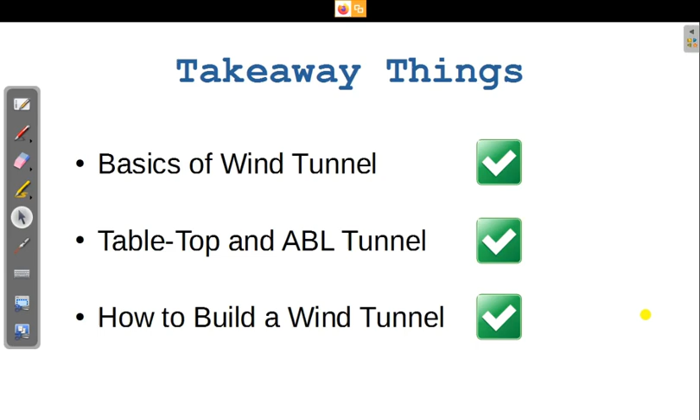Each and every part we will discuss in detail about the physics. Mathematics or formulas I will not discuss, but I will tell you where you can find them and how you can get those calculations done easily, because those are straightforward. Rather, we have to give more importance to the physical aspects. So I will be discussing a tabletop wind tunnel and an atmospheric boundary layer tunnel, giving you an example of how a wind tunnel was built in our laboratory.

Coming to the first point, the definition of wind tunnel. I hope most of you might have used a wind tunnel in your aerodynamics or advanced fluid dynamics laboratory. Typically we do some experiments there, and a wind tunnel is defined as a device, especially a test rig if you are continuously doing tests, or an experimental setup wherein a person can produce a controlled or conditioned flow. The flow can be of any fluid, water or air, based on what kind of study we are going to do. If we are using air, it will be about aerodynamics, so a wind tunnel is a device that produces conditioned or controlled flow of air to study aerodynamics.

I hope most of you know about aerodynamics. If you do not know, aerodynamics is the study of flow over bodies or bodies moving inside a fluid, and how interactions happen, what forces and moments are generated. So we will be dealing with these in aerodynamics. Mostly, a wind tunnel is a device dedicated for aerodynamic study.

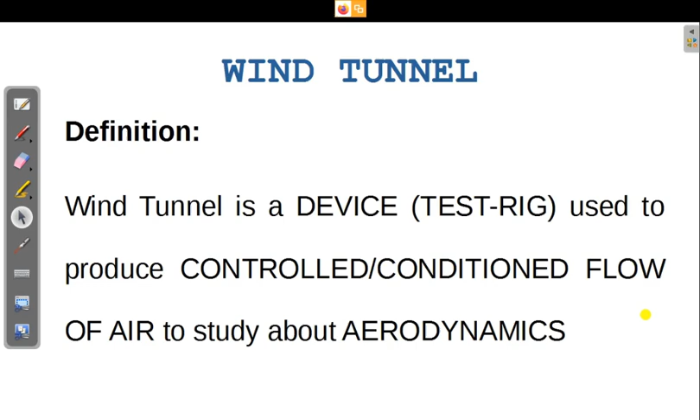So where do we use a wind tunnel, why do we use it, and what can we get out of a wind tunnel? Most probably we see wind tunnels in aerodynamics laboratories, aviation people use them, some atmospheric people use them, and you might see usage in automotive aerodynamics, where people study flow over cars and so on.

A typical usage of a wind tunnel is to find pressure values from objects we keep inside it to test, such that we find the pressure distribution over the particular body, and we want to know about forces and moments generated on the body. That's one particular aspect. Another aspect: if you want to know what kind of flow field is happening over that body inside the wind tunnel, we can go for visualization techniques. There are many visualization techniques available to see how the flow field is. So these are the typical requirements which the wind tunnel caters to.

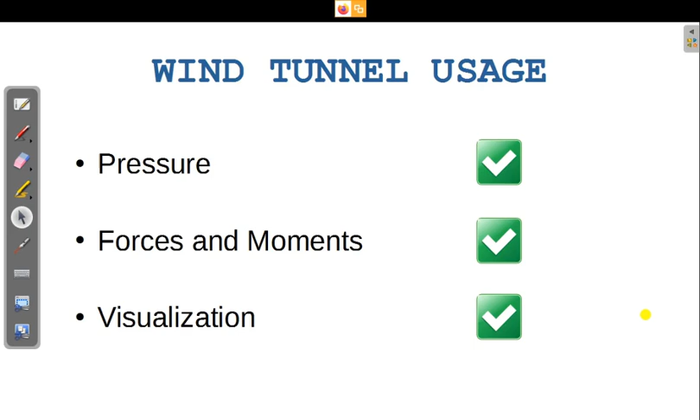So if you know what is a wind tunnel and why we are using it, you might ask what are the types of wind tunnel available and how we can classify it. The classification of wind tunnel can be done based on the flow speed.

Based on flow speed, we classify flow regimes into subsonic flow, transonic flow, supersonic flow and hypersonic flow, in comparison to the speed of sound. When the flow is comparable to the speed of sound, it is sonic flow, and above it, it's supersonic flow. This is typically expressed by a non-dimensional number called Mach number.

So if Mach number is 1, it's called sonic. Mach number greater than 1 is supersonic. Mach number greater than 4 or 5 is called hypersonic flow. If it is typically less than 1, we call it subsonic flow, and if it is less than 0.3, we say the flow is completely incompressible. So based on flow speed, we can classify wind tunnels into various types.

Based on flow direction, we can say whether it is blow down type or suction type - whether we are taking in air from the atmosphere, conditioning it, allowing it into the wind tunnel, and then discarding it to the atmosphere, or the other way wherein we take air, push it, test it, and then discard it. So two types of flow direction based classification are available.

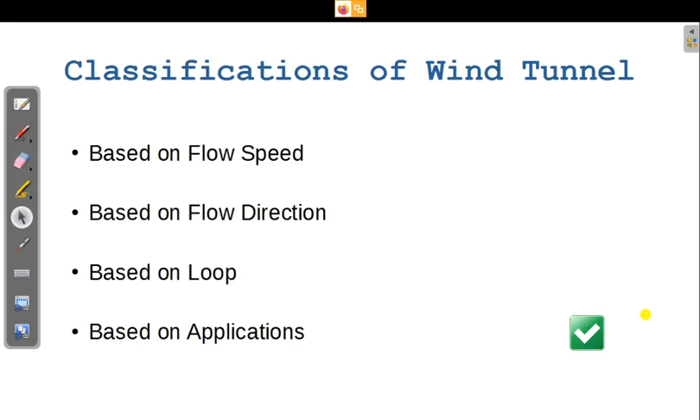And there are a few wind tunnels based on applications or design aspects - that's where I mentioned a tabletop tunnel and atmospheric boundary layer tunnel. Hope I have given you a brief idea of what is the classification of wind tunnels.

Moving ahead, in this particular webinar I am going to concentrate only on one particular wind tunnel. This is a subsonic wind tunnel which we have seen in our labs, but we might not have seen it in a perspective where I see things differently from how other people see. I will be discussing those aspects mostly in terms of physics. If you understand this, I think it's going to help you think in your own way how I can come up with a wind tunnel by my own from the parts available around us.

So this is a typical subsonic wind tunnel which you have seen in your laboratory, or if you Google you can easily find it. Thanks to Mr. Gousik who designed this in a very short time for the webinar. If you see this picture on the extreme right side, I have mentioned the blue arrows - these blue arrows are the flow which we are taking from the ambient conditions, that is from the surroundings.

Then you have a constant area section - this is the flow conditioning unit. Moving forward we have a test section, then a diffuser, and then a motor. Inside this diffuser we have a housing within which a fan is placed, and this is a typical subsonic wind tunnel. With this we have associated equipments like pressure manometers or digital manometers or load balancers.

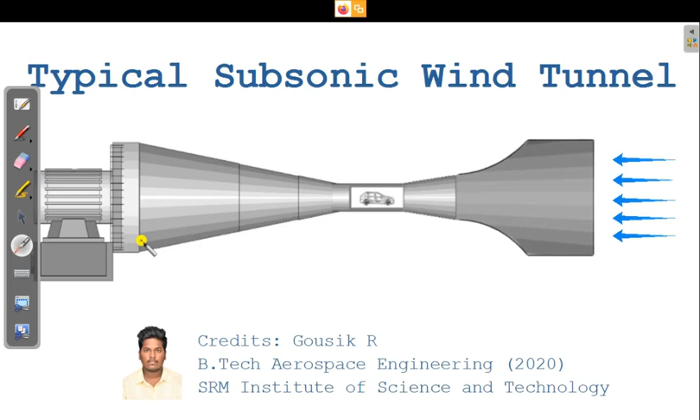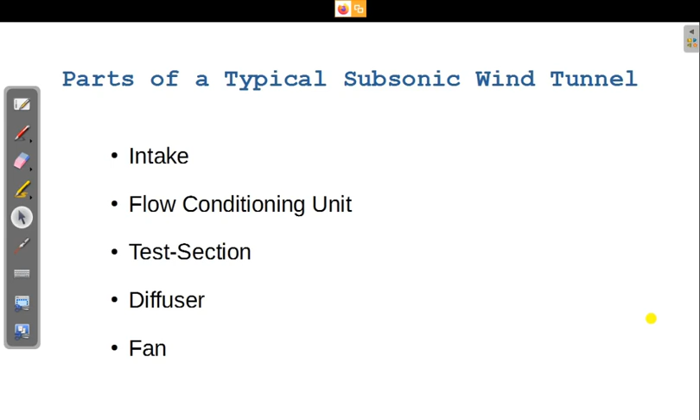So, parts of a typical wind tunnel. I have shown the parts in the schematic, so let me explain one by one. There is an intake on the extreme right side where I showed the arrow. Next, we have a flow conditioning unit - that's the constant area tube followed by a contraction section, which is also part of the flow conditioning unit. Then we have a constant tube again, which is the test section where the models are housed. Then we have a diffuser, and finally a fan, which is the source of the flow.

So what does the flow conditioning unit consist of? If you consider the definition of a wind tunnel, I used a particular phrase - we are going to use a conditioned flow or controlled flow. How to condition or control the flow is based on how you tweak the fluid flow. Control is about speed - if you have a motor connected to a fan with an RPM controller, you can control the velocity of the flow. That is the controlling aspect. The other aspect is the conditioned flow.

The conditioning aspect is what I am going to discuss in this flow conditioning unit. Typically it has the intake on one end and the test section on the other end. In between you have a constant duct within which you find honeycombs and grids, and at the end of this constant area duct you have a contraction section. So this is going to condition the flow.

So why do we have to condition the flow? That's the first question that arises. If you see typically in a room or hall, you might find people moving around, fans switched on, differences in temperature if an air conditioning unit is operating, or gradients of thermal aspects - so some flow is happening inside that environment. The flow can be turbulent, laminar, swirling, fluctuating - whatever random characteristics you want to see, all might be present in the ambience. Taking this into account, we don't want to bring all these disturbances into the wind tunnel, so we want to avoid them. That's where we go for conditioning the flow.

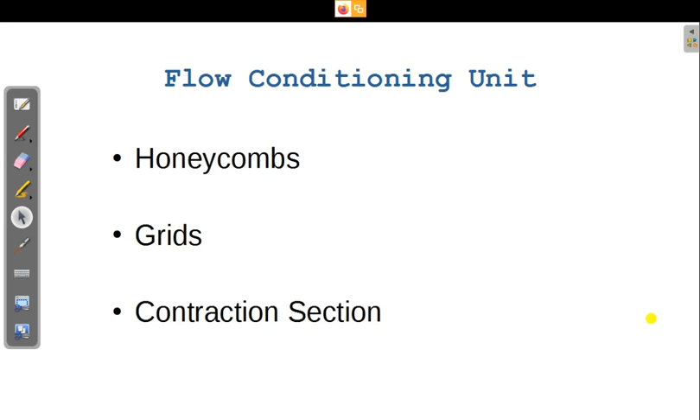The first part is the honeycomb structure. You might know what a honeycomb structure is - honeybees collect wax from flowers and come up with a structure that is almost hexagonal in shape, with multiple hexagons added together. This is found in trees at taller locations, and it's a tubular section inside each hexagonal cell where the honeybees store honey. That's where the honeycomb name came from.

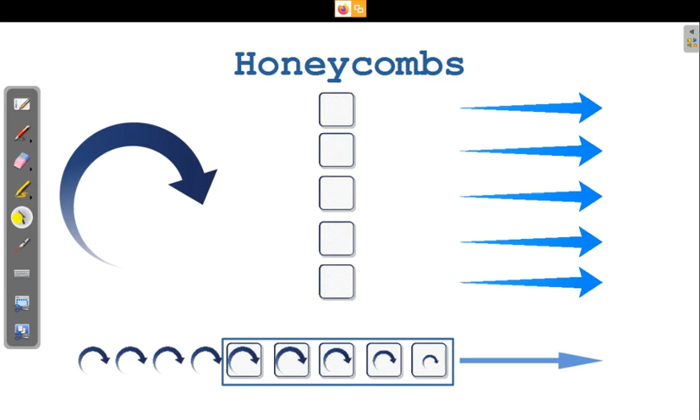Essentially, if you have a grid, you have to decide what should be the passage between the wires, what should be the wire thickness, what is the separation, and what is the porosity. You have to see what kind of friction or pressure losses it can create. So you can decide about the porosity and the vortical structures which can pass through this particular grid or mesh.

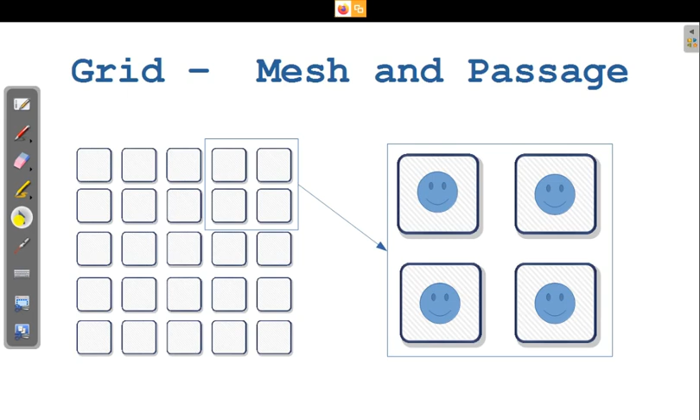So going into a typical explanation for this grid structure, I've given an analogy and a basic explanation. What is the physical background of this? If we want to see it in terms of fluid flow physics, I have to go to the next slide to explain flow over a cylinder and flow through a gap, nozzle, or orifice.

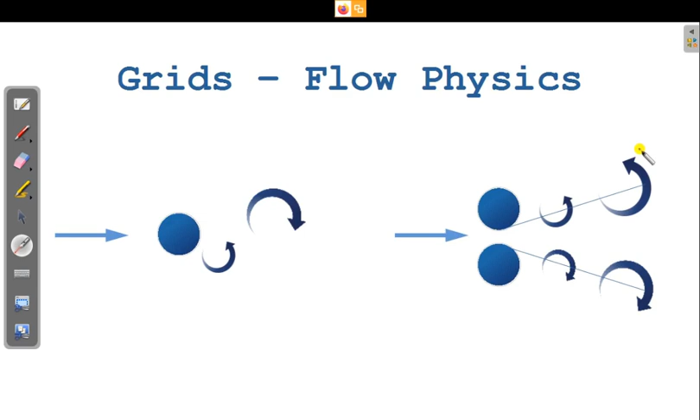So you have to know what turbulence is, because I didn't introduce turbulence earlier. So I will tell some aspects of turbulent flow. If you consider a laminar flow, it might be moving as laminates, layer by layer. And if you consider a turbulent flow, it might be randomly fluctuating, forming three-dimensional vortices or eddies, like rotating blobs of fluid, rotating pipes of fluid, rotating filaments of fluid, randomly fluctuating fluid. So it has multiple characteristics and is completely a three-dimensional flow.

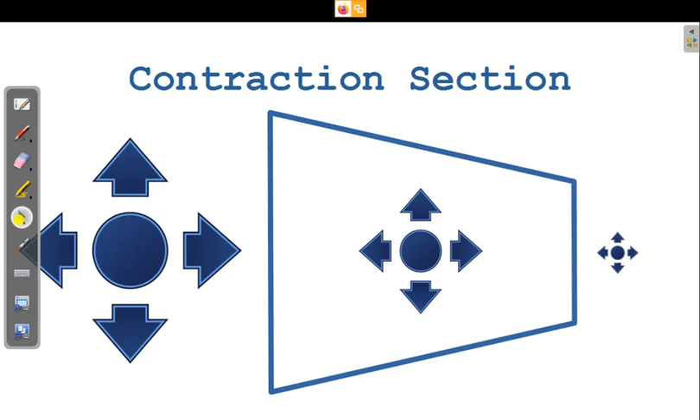Coming to typical examples, I told you about the tabletop wind tunnel which we fabricated in our laboratory. Thanks to Bunni, Rakshantha and Sanjana, these three people did this job when they were doing their bachelor degree, and this was applicable for a particular aspect of combustion phenomenon.

So I will go into the basic schematic. Why we wanted to go for a tabletop tunnel is that we had lesser space in a particular room allotted for us, which was a visualization lab. It was typically a 10 by 10 foot room, and we had a smoke tunnel there, along with another experimental setup. We had a leased space where a 2 meter by 1 meter table was allotted for us. Within that table, we had to create a wind tunnel to study some particular combustion aspect, or flow over a particular material which is burning.

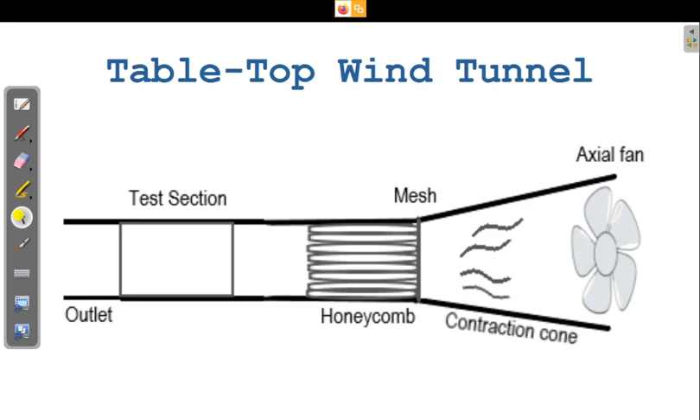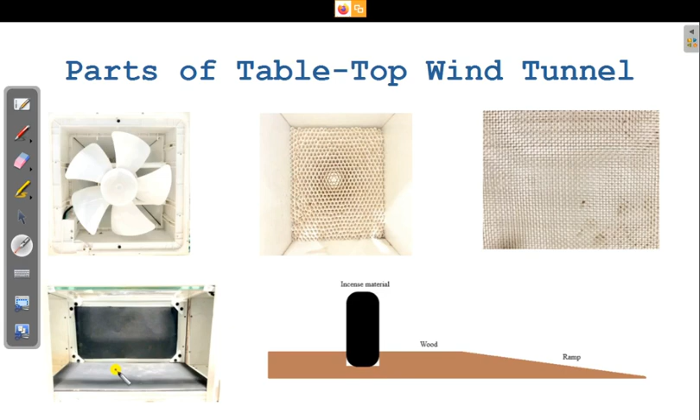So this covers the parts of the wind tunnel and the fabrication process. The result here was completely done with plywood: first designing the parts individually, then cutting and fixing them with screws. You'll find all screws used for fixing the wooden planks.

Finally, the fan was placed on the right extreme side, and you'll find a regulator, which is a potentiometer, to control the speed of the fan for controlled flow. Inside this place the honeycombs are seen, along with a grid, and a window allowing people to open the test section to place material inside and handle it. This tube is the extension connected to the outlet or diffuser.

This outcome was presented at a conference and is about to be published soon.

With this tabletop wind tunnel, one can do some basic studies. Our application was to study combustion, so we had a simple wind tunnel, not a complex profile, which was fabricated within a week.

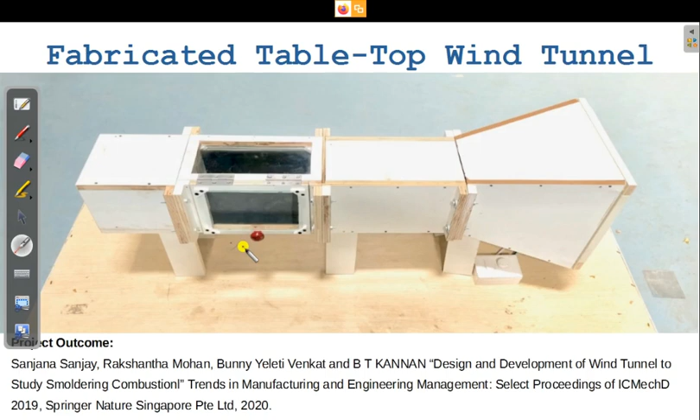I'll show some outcomes from this. What we did was take the incense material, ignite it, keep it on the bottom base plate inside the test section, and shine a laser from the top side. We viewed from the window, took videos using a high-speed camera, and then post-processed the images to get the results.

Typically on the front leading edge side you might find a stagnation happening, which means the incoming flow will have more oxygen, such that it can enhance the burning rate. If you track that particular point, you might find the highest burning has happened at that stagnation point, and the least burning on the rearward or aft side.

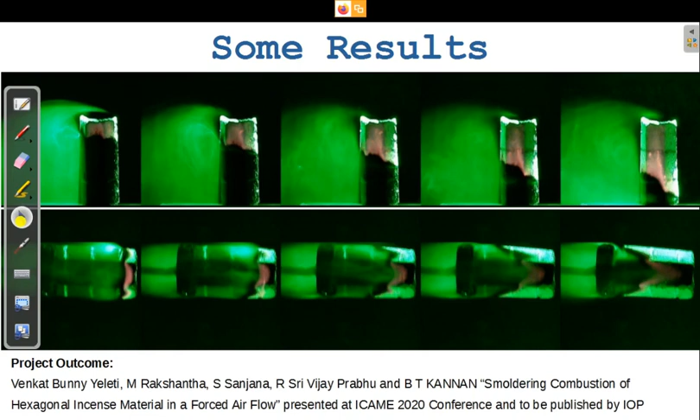I think this result was also presented in a conference, and it's to be published soon.

Moving ahead, we have another example: an atmospheric boundary layer tunnel. Thanks to Murukesh, Akhil and Saneesh, these three people came up with a huge wind tunnel, stationed in our hangar, at a cost of about 6.5 lakh rupees. Murukesh is here online, joined with us to help with queries about this tunnel. Let me go ahead and show you how these people did it and what is the physics behind it.

The basic requirement for this atmospheric boundary layer tunnel is understanding what an atmospheric boundary layer is. Typical wind tunnels have a uniform profile, meaning the velocity is uniform, but in this profile the velocity increases with respect to height.

The bottom layer is the ground, above which you find buildings, trees, and terrain. When you have flow over this terrain, the bottom disturbances create a highly turbulent flow. As you move up in the atmosphere, this turbulence goes down and you find more laminar flow.

To create this kind of profile inside a wind tunnel is a little difficult because it needs length to develop a boundary layer into a completely turbulent zone. A typical subsonic wind tunnel has a certain length, but if you want to develop an atmospheric boundary layer tunnel, it needs to be lengthier than what you typically see in laboratories.

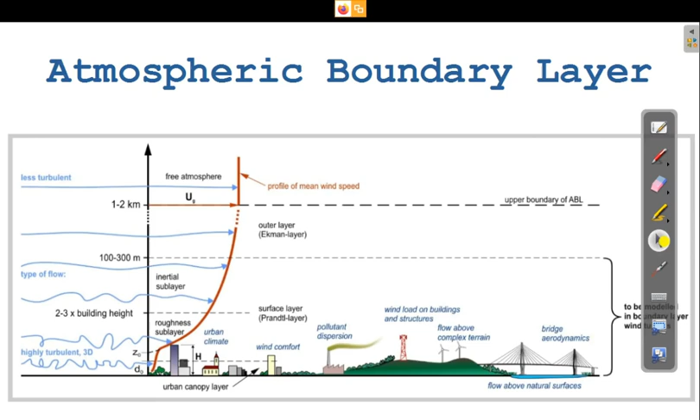Taking this into account, we started designing this particular tunnel, basically calculating the flow requirements, the test section size, and then we moved ahead with the structural part.

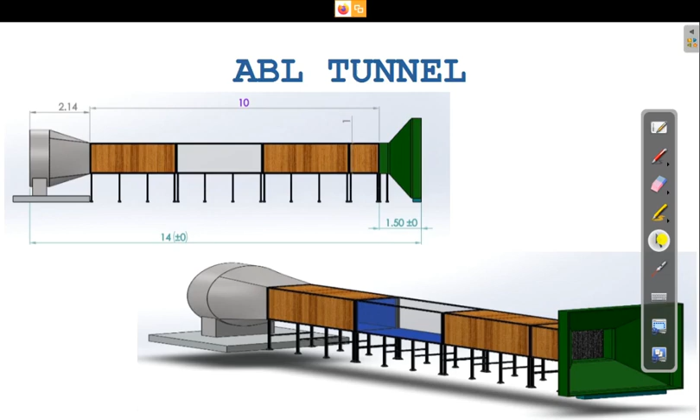With this tunnel design in mind, we went ahead with the initial fabrication process. First we had to decide how the structure would be made, and that's where we came up with the idea of using aluminum structures.

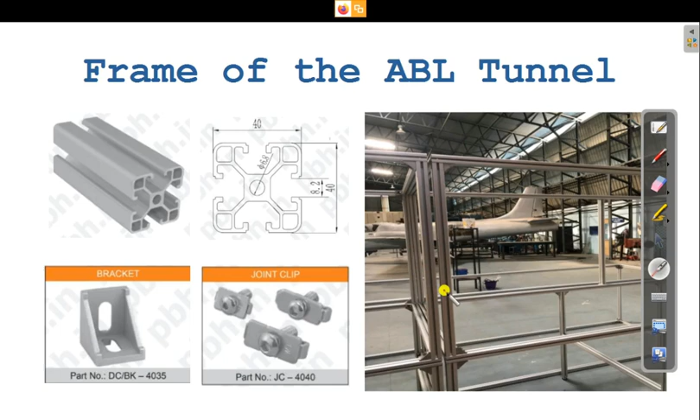After finishing this frame, people started working on the outer structures, that is the walls of the wind tunnel, and then moved ahead to other aspects. This slide will explain the phases which our group had gone through.

After creating the structure, we had a bunch of planks, that is plywood, which was strengthened and placed between the profile channels, because the profile channels has grooves to accommodate these wooden planks, such that the complete outer structure was made. Once the outer structure was made, the honeycomb structure was also made, which is shown in another slide.

Once the complete structure was done, carpeting was done inside the tunnel to produce rough surfaces, and this will enhance the production of the turbulent boundary layer on that particular carpet surface.

Then this wind tunnel test section was fixed with glass. A complete single piece of glass was held between this aluminum frame, on three sides, such that it can allow visualizations to happen.

You might also see a person moving from the bottom side, because there is an opening where a person can go inside from the bottom, into the test section, to place the model or fix the model and turn it. So whatever manipulations you want, you can go inside and do it. That's how the wind tunnel was designed.

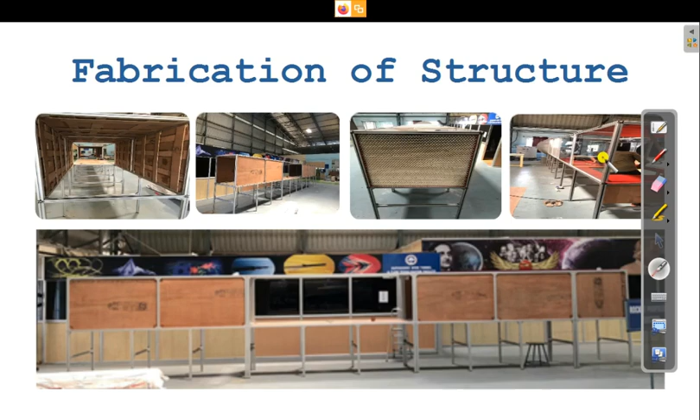For building honeycombs, either we had to go for metallic structures or commercially available products. That's where we decided to go with plastic PVC pipes, easily available from plumbing or hardware shops. We took pipes which are used for electrical wiring in buildings.

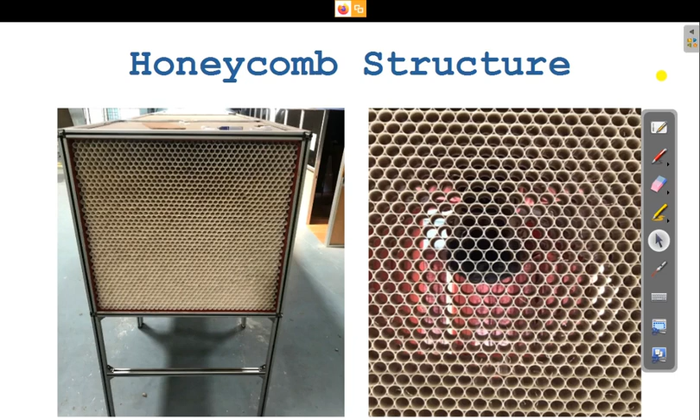This pipe was cut at a particular aspect ratio and stacked, then strengthened and stuck together with quick fix glue, and we had a typical mesh structure shown on the next slide. On the left picture you might see a typical mesh structure.

Again, it is a mosquito type mesh, and it was a metallic mesh. It was fixed to a frame of 1 meter by 1 meter, slightly less than that, because it has to fix inside the wind tunnel. This is to reduce turbulence.

On the right side you might see a finished test section. In front of that you might also see a fan, and this is a typical model which was kept inside the wind tunnel to test its aerodynamic properties.

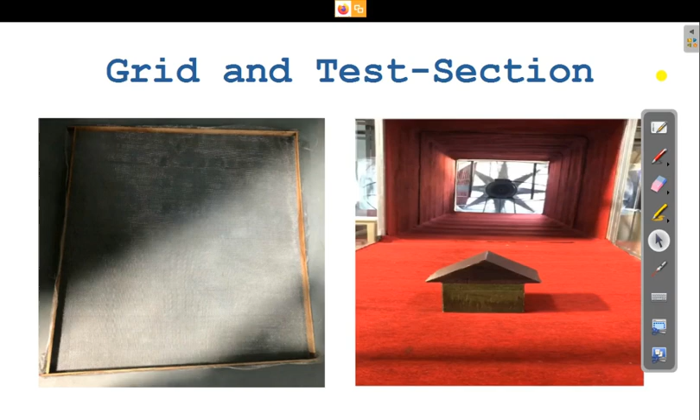The flow source of the wind tunnel is made available using an axial fan, purchased from Nadi fans, and you might find these kinds of fans typically available in industries. There were two choices for this source of flow: having multiple smaller fans.

Then stacking them up at the end side of the wind tunnel like a grid or mesh, and controlling all the fans, which is a difficult task. So we had to come up with a control unit.

On the right side you are seeing the flow conditioning unit, a typical controller which is like a frequency control device. So you can control the RPM of this fan such that you can have different velocities. This is the typical source which we have used.

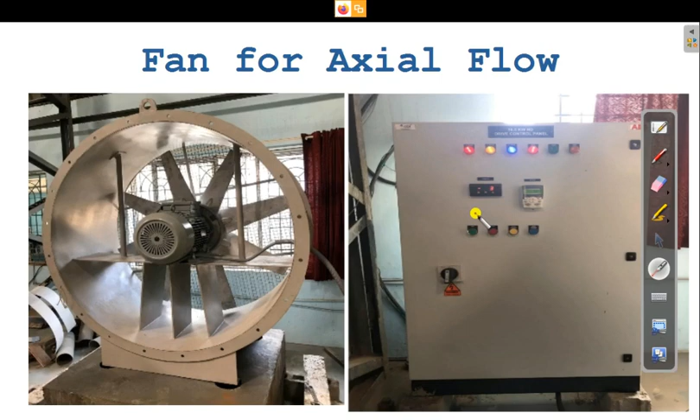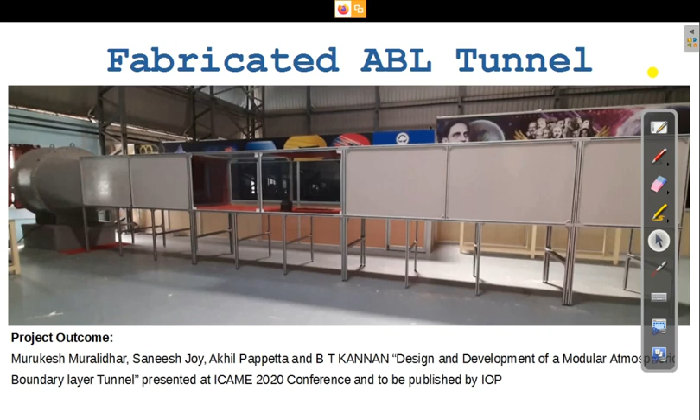This is the completed atmospheric boundary layer tunnel, and we had tested a few models. I am not showing results here due to shortage of time. This tunnel is presently useful for people to study flow over different objects like buildings, wind turbines, terrains, and typical street structures with vehicles on roads or something like that.

With this, I thank you all for patiently listening to me for an hour, and I hope I have given a brief introduction to what is a wind tunnel, what are the parts of a wind tunnel, and what is the physics behind each and every part. I gave a couple of examples of how we build a tabletop wind tunnel and an atmospheric boundary layer tunnel. I have not shown calculations here, but you can ask us and we will be able to share it with you, or you can refer to our papers which will be published soon, which will bear the calculations or formulas, and I will be happy to answer questions from your side.